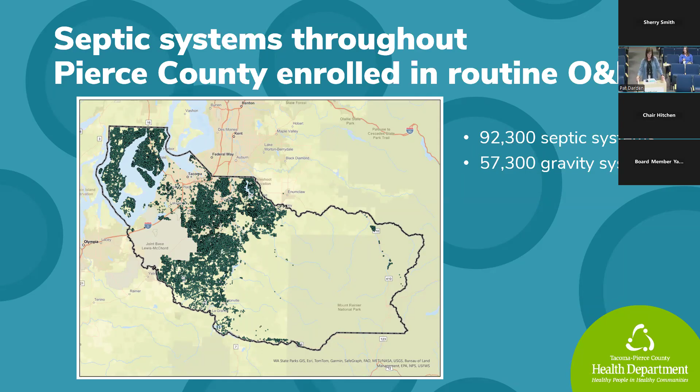So our reduced inspection frequency, again, we've heard from community members, this is a burden to them. It's expensive to maintain their septic systems. And so what we did is we successfully petitioned the Washington State Department of Health and asked for a waiver to increase the time between inspections. This is only for gravity systems, from 3 years to 5 years if they meet certain criteria. And so we're really proud to say that we're the first county in the state and the only local health jurisdiction that offers this option.

Homeowners can take a class. They learn best practices, what to watch for, and there are some questions that they have to answer. And so when they do that, they can then have their next inspection date moved from every 3 years to every 5 years. So that gains them 2 years without having to do an inspection. They still have to be done by a professional, but that's a benefit. It basically gives them an extra 2 years, and it reduces their cost almost in half to actually do their own inspections.

So providing education and guidance on maintaining their system empowers them to use best practices. It helps them extend the life of their system, which are very expensive to fix. You've probably heard us say before, the current system they have is the least expensive they're ever going to have. And so that's true. And we've had really good feedback from participants in our classes so far. Next slide, please.

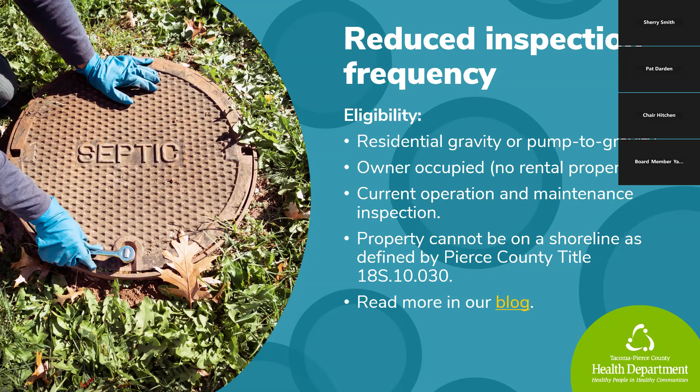So what we've done so far, next slide, is we started this in September of 2025 as our first pilot project. We've held 7 classes so far, and actually technically we've held 8 because we had one last week. We've had good success with that. We've had 162 people apply. Of those, 129 were approved. So that's great. The 33 that didn't qualify has normally been because they didn't have a gravity or pump to gravity system, so it's some other kind of system, or they were too close to a shoreline or water. That's been the majority of reasons.

The way that we notify people as we've rolled this out: we already send notifications to people to remind them they need to inspect their systems. So we incorporated this information into the letter we already had going out, just to say we've got a new opportunity for you, and it only goes to people that have gravity systems. Then we let them know that there's a class available. They get that letter 2 months before their inspection is due, so they have 2 months to get into a class. Of course, if they need a little extra time, we can give them an extension. So we work with them on that.

But it's been really good for people, and really good feedback that they learned a lot. And so that's what you're going to experience today with Amy. She's going to walk you through, like I said, a very abbreviated, slimmed down class, and you get to see what the public experiences. So with that, I'm going to hand it over.

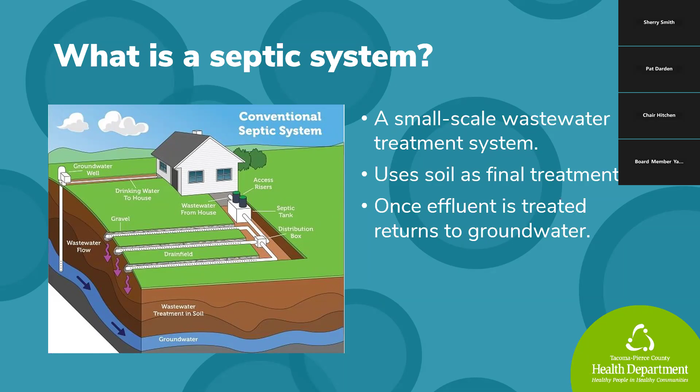So septic system overview. What is a septic system? A septic system is a small scale wastewater treatment system. It uses soil as the final treatment, and once effluent is treated, it returns to the groundwater. In this cross-section photo, you can see how the effluent goes from the septic system down through the soil to be treated and then into our groundwater, again a natural resource. Next slide. The first short video will provide information on the basics of on-site septic systems. So enjoy.

Hi there, welcome to Septics 101. In this video, we're going to cover the basics of sewage and on-site septic systems. In the past, sewage was not treated, and the outhouses or cesspools that were used did not effectively remove pathogens, which are harmful disease-causing organisms. Bacteria, viruses, protozoa, and worms can all be present in domestic wastewater and septic systems, and can cause diseases such as hepatitis, cholera, diarrhea, and other gastrointestinal illnesses.

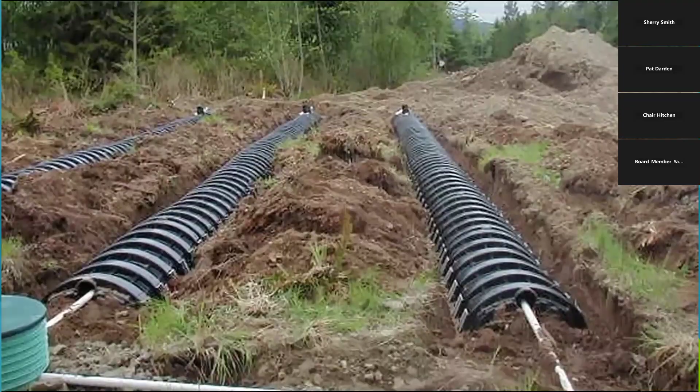In modern times, rules and regulations have been established on how to properly dispose of sewage. When not connected to a wastewater treatment facility or sewer, a home's best long-term option is a septic system. Clearly, it's important to make sure your septic system works properly. But first, you need to know how your system works.

In this video, we'll look at sewage and its potential impacts on health and the environment, and we'll explore the different types of septic systems and how they work. We'll also talk about being a responsible septic system owner and how to care properly for a system, as well as how to detect a system failure and get help. This is all to maintain the health of your household, for you and for your family, and protect the water quality, as well as save you money.

If you're completing this course for a certification program, there will be an exam at the end of the presentation. If you're looking to install a septic system, looking to purchase a home with a septic system, or simply wondering about your existing system, this video is for you.

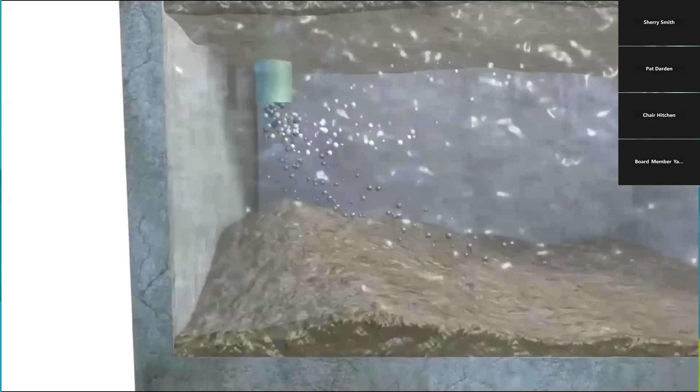So what is sewage anyway? Sewage is all the wastewater that comes from your house, your toilet, your dishwasher and washing machine, sink and shower drains, and all the solids and waste that comes with it. Up to 50% of domestic sewage is created by your clothes washer and toilet. Your dishwasher produces 3%, while your bath, shower, and sink faucets produce the remaining percentage. All this wastewater exits your house and enters your septic system. By the way, rainwater, surface water, and groundwater are not considered sewage.

Next slide. Next slide. Perfect. I know it's a little touchy with the videos. All right, so you guys thought your participation was over at the very beginning.

Nope, just kidding. So question 1, what is a septic system? Choose all that apply. Once you know your answer, I'm going to go through the list of them. Please raise your hand. A, a type of water treatment plant. B, a small-scale wastewater treatment system. C, a drainage system for rainwater. D, a public sewer system. How many of us chose A? B, C, or D? Next slide. B, a small-scale wastewater treatment system. Good job, folks. All right.

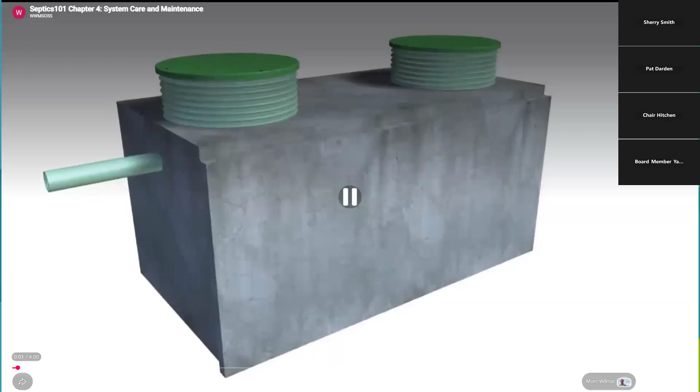In our next video, we will be learning about best management practices for your septic. Septic systems need regular maintenance, just like your car or your home. First of all, know where all the components of your system are located on your property. An as-built or record drawing is a technical diagram of your septic system. Check with your local health department to obtain a copy of your as-built.

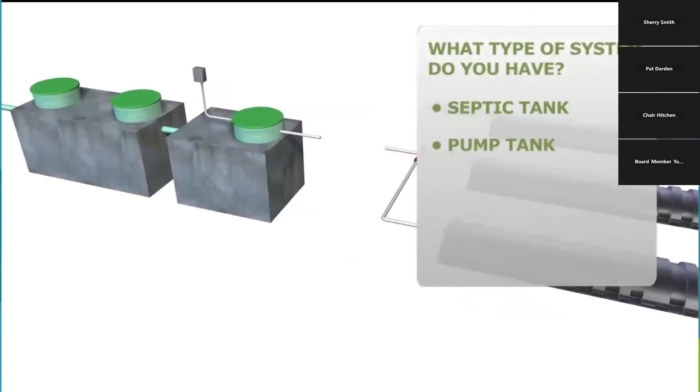The record drawing can tell you what type of system you have, where the components are located on your property, and provide other useful information. Record drawings are not always accurate, so make sure you verify it's correct. If you need to have your system located, make sure you also know the location of all utilities. Depending on the type of system, you'll want to know the location of your septic tank, pump tank, sand filter, distribution box, and drain field.

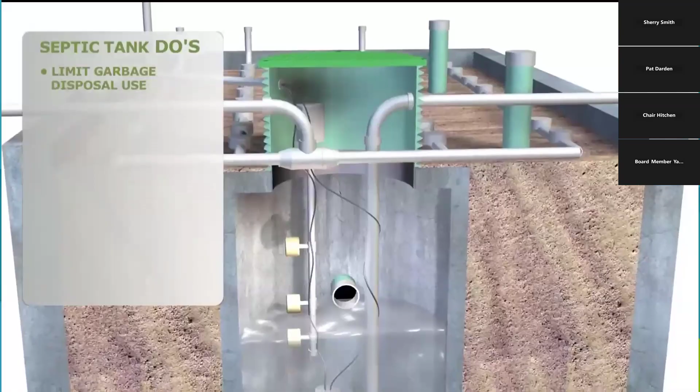Let's talk about what you can do to protect and care for your system on a daily basis. Garbage disposals grind up unprocessed food into fine particles, which can clog components of your system, like pumps or even drain field pipes and soil. Use it sparingly. An alternative is to compost. Make sure you have an outlet baffle screen installed to help protect the drain field.

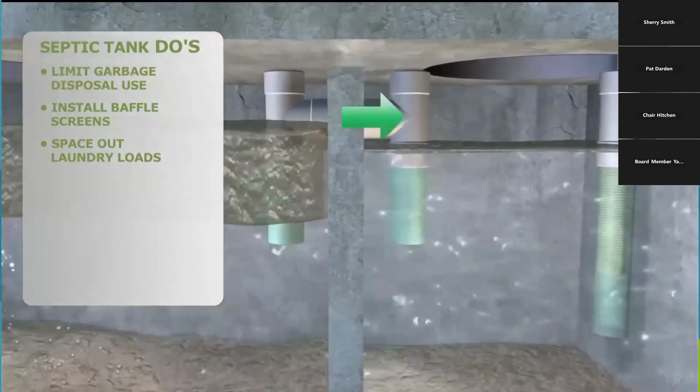Doing your laundry has a big impact on your septic system as well. Space out your laundry loads to allow your septic tank to settle properly. If water flows too rapidly through the septic tank, solid material will not separate and could move on to more sensitive parts of the system. Limit the use of bleach. Bleach kills the helpful microbes which treat the wastewater. Liquid fabric softener can seriously alter the chemistry within the septic tank, hindering proper treatment. Installing high-efficiency washers and toilets can increase your septic system's life and save you money.

Do not throw garbage into your toilets, or feminine products and wipes of any kind, even those that are flushable. Kitty litter and pet waste of any kind should never go into your septic system. Some cleaning products claim to be safe for septic systems. This may or may not be accurate. Look for cleaning products which use everyday ingredients such as vinegar and baking soda. If you do use strong cleaning products, just use less.

Never put paint, thinners, or strong chemicals of any kind down your drains. Many areas have disposal services for dangerous or toxic material. To dispose of unused medicine, bag it up and throw it in the garbage. Check with your local health department or pharmacy to find out whether a drug take-back program is available in your area. Do not drain hot tubs and water softeners into your septic system. There's no need to waste your money on septic additives. Just use your septic system properly.

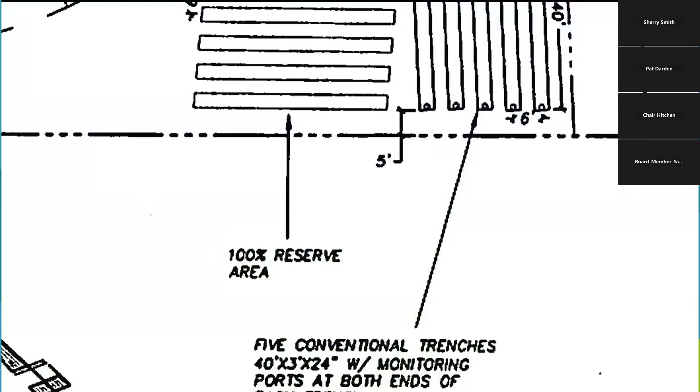Let's talk about how to protect your drain field. It's critical to protect your drain field and reserve area. The reserve area is a part of the property set aside in the event that the current drain field fails. Protect your drain field from motor vehicle traffic, parked vehicles, heavy loads, and livestock.

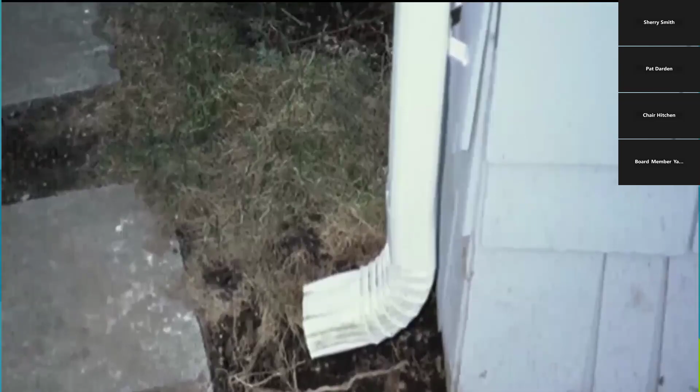Don't dig, use heavy fertilizer or weed killer on your drain field. Also, be sure not to build anything over your drain field. Protect your drain field by diverting surface or roof water runoff away from it. Look for shallow root plants. Contact your local nursery or health department for more information about what's safe to plant over septic systems.

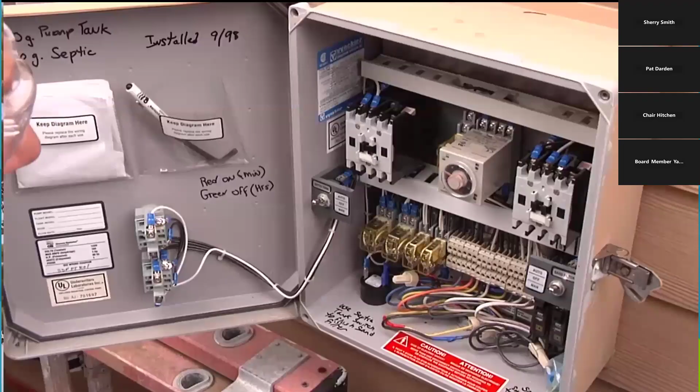Risers increase accessibility to the system for you or a professional. They can also keep costs lower if a professional needs to service the system. If you do not have risers, you should have them installed.

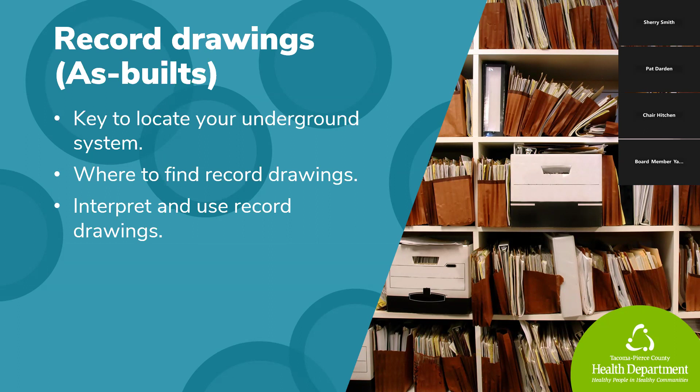Perfect. All right, we're going to go into our next topic, record drawings and/or as-builts. So record drawings or as-builts, these guys are a key to locate your underground system. We're going to look into where to find your record drawings, and we're also going to learn how to interpret and use your record drawings when you're on your site. Next slide.

So we're going to first go into how to find your septic system records. The link right here will take you directly to our document search page on our website. From here, you can try several different methods of search. You can search by parcel, you can search by address. If you're searching by your address, we always recommend trying to do your house number and then your street name. Oftentimes, the less information you give to the system, the more documents it produces for you, depending on how we saved them throughout the years.

You can also search by your owner name or a past owner name if you happen to have that on file. The instructions are there on the website to follow along to be able to search. If nothing is pulling up and you're not able to find any record drawings, we do have that little blue button on there that you can submit a public records request, and you'll fill out all the information, send it to us, and then we will do our work on our end to see if we can dig something up. Oftentimes we have different tools that we can use to be able to source something down.

Keep in mind that some older septic systems were installed when record drawings weren't necessarily a requirement by the health department. So oftentimes there won't be a record drawing on file for those older systems, but your septic company can help to locate your septic system if you would like to have that done. That does come at a cost. So always just keep that in mind if you're thinking about doing that. Next slide.

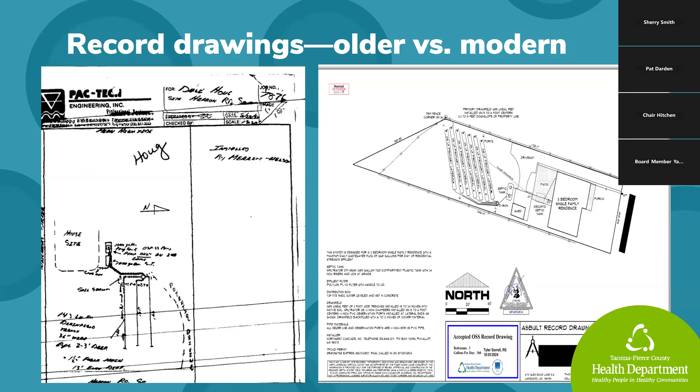I always recommend people go back, especially if they're new homeowners to a new house, and look at the history of what the septic system has been through. Has it been maintained on a more regular basis? Have there been any repairs, pumpings, inspections, etc.? It's always great to go back and look at the history of the septic system and the life that it's lived so far. Next slide.

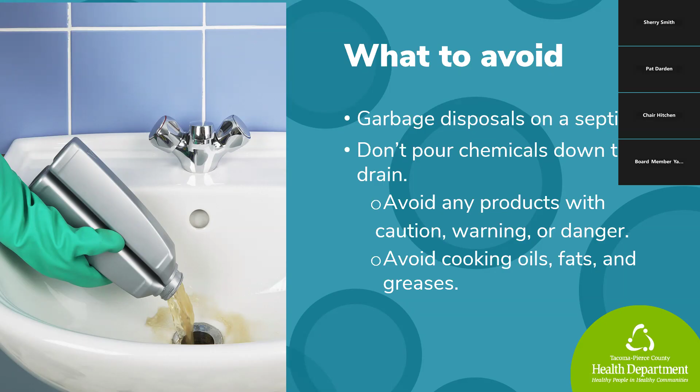We also want to conserve our water. So break up those household chores that use water. So limit the number of laundry loads per day, run the dishwasher, the clothes washer, and even the shower at different times. I even do this and I'm on sewer, so it's always a good practice. And then fix your drips.

A leaking faucet can waste 5 to 20 gallons per day, whereas a leaking toilet can waste up to 4,000 gallons per day. And yes, that seems like a lot, but what impact does that have on your septic system? If you're overloading your septic system with water, it can cause a potential failure quicker. So just keep that in mind. You want to be using the gallons per day that it's sized for. Next slide.

Protect your drain field. Avoid heavy objects over your drain field. Don't park or drive over your drain field. Heavy animals can compact the soil, and they can also damage the components. So just make sure you keep those clear.

Keep full access to your septic tank. Don't build a deck over your septic tank. There's been many times where I've gone out to do a property sale inspection for a septic system, and I get there on the property and it's a deck, of course, on top of the septic tank, right? A lot of homeowners are very smart and they will build a latch system so they can pull up their deck. And then there's easy access for us and the septic professionals to be able to get to that. So we just want to make sure we can get to all the components in case there's an emergency happening, right? Next slide.

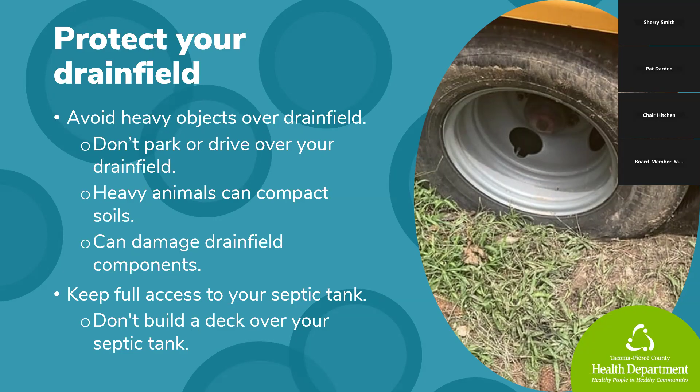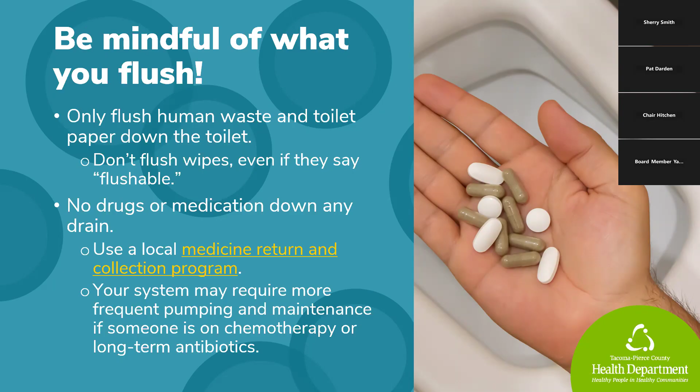Be mindful of what you flush. Only flush human waste and toilet paper down the toilet. Please do not flush wipes, even if they say they're flushable. I promise you they're not, and this goes for sewer as well. No drugs or medication down the drain. Use a local medicine return and collection program, and we do have information about that here on our website. Your system also may require more frequent pumping and/or maintenance if someone is on chemotherapy or long-term antibiotics. Next slide.

And why would it need more pumping or maintenance if someone's been on chemotherapy or long-term antibiotics? It's because in our septic system, we have what's called a microbiome, right? It's more sciencey talk real quick, but your septic tank is full of microorganisms, or what we like to call bacteria, right? These little guys help to break down waste to help prevent the solids from going out into the drain field and from building up in your tank.

So think about household cleaners, right? Disinfectants that we spray on our countertops. We want to use them to get rid of bacteria. Same thing if you're pouring too much down your toilet, down your drains, into your septic system, it could actually kill off that microbiome, those organisms that are helping to break down those solids, right? So we just want to keep them happy and clear. We don't say you can't use cleaners or additives. We always just recommend using them for what they're designed for. Use the dosage that's correct, right? Don't overuse them. Next slide.

All right, get our hands ready. Here we go. A leaking household fixture can cause harm to your septic system if not addressed. True or false? How many chose true? And false? I hope no one chose false. Good job, 100%. All right, next slide.

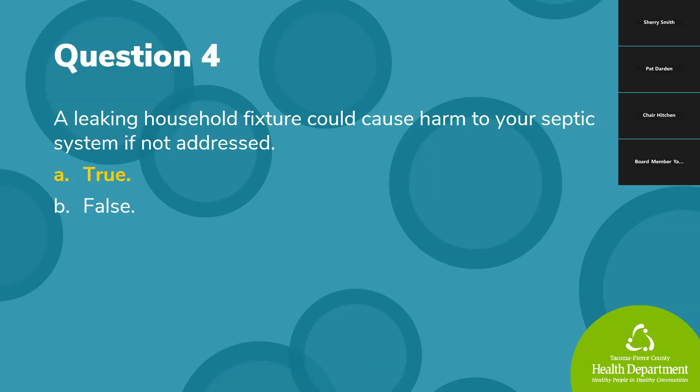So what should you do before a septic inspection? Get a record drawing of your septic system if there's one available. Call a septic professional to inspect your septic system every 5 years if you are part of this program and have been approved. We do have a certified professional list on our website, so you're more than welcome to look into that. Locate your system components and uncover tank lids for the septic professional. You can do that, or you can let the septic professional do that as well. They have to pull up your record drawing anyways before they come out on site. If they uncover your lids and they have to dig to them, usually that does cost something. So if you're trying to save some money, maybe dig them up yourself or have a friend do it.

Review your water usage and then just maintain those records. Look up the inspection reports, know what's going on with your septic system, especially after you just had a professional go out there. Look at the report that they submit just after your inspection. Next slide.

So what should the septic professional do when they come out on site? They're going to inspect the septic tank, right? They're going to inspect the pump tank and the pump if you have a pump to gravity system. They're going to pump the tanks if needed, so they'll measure your scum and sludge level and make sure they're at good operation levels. And then they're also going to check the drain field area. They're going to walk your drain field area, make sure there's no ponding, no squishy soil or a smell coming from your drain field. That's what they're going to really look out for. Next slide. All right, things to watch out for.

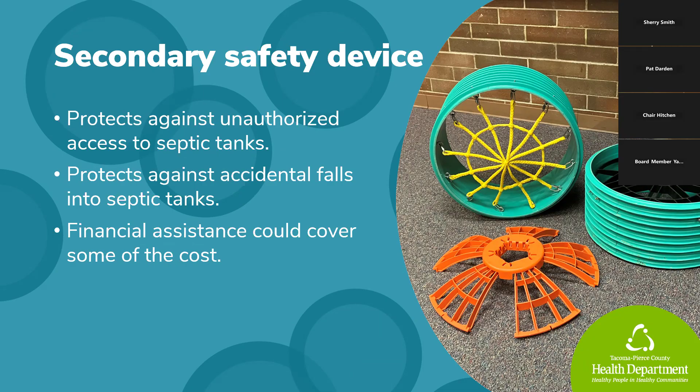Next slide. Perfect. And what is a secondary safety device, you might ask? It helps protect against unauthorized access to septic tanks. It protects against accidental falls into septic tanks. And here at the health department, we do have financial assistance that can be offered to go towards and cover some of the cost for a secondary safety device to be installed. Next slide.

Tank problems. Missing or broken baffles. So the inlet baffle assists with separation of liquids and solids as the wastewater is going into your tank. The outlet baffle prevents solids from entering into the drain field lateral lines. And usually, if solids enter into our drain field lateral lines, that's where you start to see clogging happening in your drain field over time.

Leaking tank. Low liquid levels could mean a cracked or leaking tank. So you always want to make sure that your system is at operational levels. Next slide.

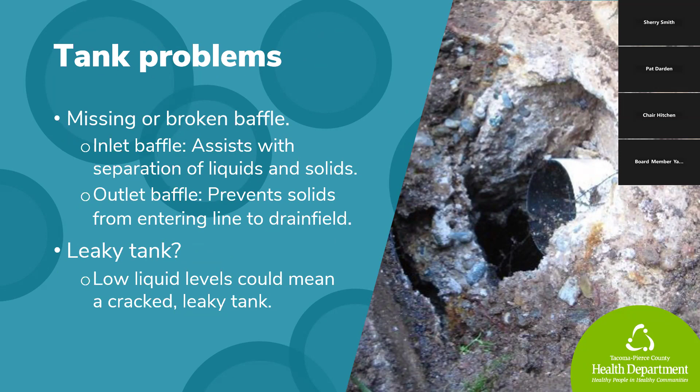Electrical problems, pump malfunctions. So only septic professionals or electricians should repair or replace. An alarm malfunction: an alarm should usually sound when the water levels are high in a pump tank. Gravity systems might not have pumps or alarms. I also advise with a pump to gravity system, alarms weren't really required until about 1982 in our county. So your pump to gravity system might not have one on.

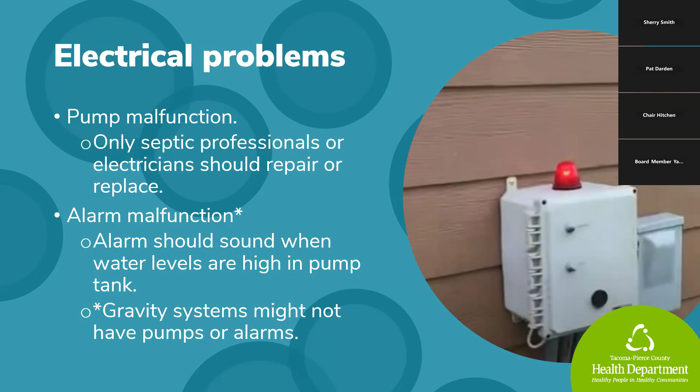Doesn't mean it can't have one installed. So something to think about if you know you don't have an alarm on your system. I always recommend just kind of thinking about it. It helps protect to make sure, again, your system is at operational levels. And then call a professional. Don't mess with your control panel if you have one.

Some newer systems don't have panels, or do have panels like this one, excuse me. If you have an alarm going off from your panel, you might usually be able to silence that alarm. But you can silence it, but call a septic professional to come out and see what's going on with that panel.

All right, next question. What are signs of potential failing septic system? Choose all that apply. A, dry drain field when there's no rain or irrigation. B, sewage backing up into the home. C, low levels in the septic tank. D, dead vegetation or brown area over the drain field.

How many of us chose A? I can feel the tension. B, C, or D? Okay, next slide. The correct answers are B, C, and D. Good job, everyone. I'm impressed. All right, next slide. Thank you.

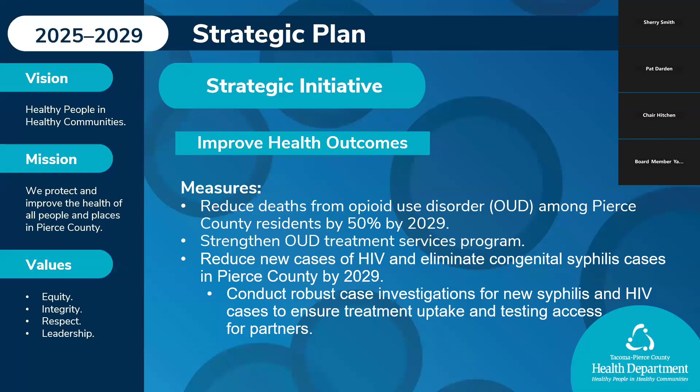So we've linked a couple of the measures from our strategic initiative and our strategic plan, of which we're measuring the reduction of deaths from opioid use disorder among Pierce County residents, as well as strengthening our OUD treatment services program, as well as reducing new cases of HIV and eliminating various STIs in Pierce County by 2029.

So currently, our public health clinic provides the following services. We're providing STI and HIV testing and STI treatment. We're also providing opioid use disorder treatment, and that includes both medications and counseling. Under the public health clinic as well, we have our street medicine program, which you heard about probably recently, addressing urgent and primary care services for people experiencing homelessness.

So previously, these were siloed and they were in different divisions and locations within the health department. And you'll see some of the areas downstairs when we go take a tour. Next slide. So why clinic integration? Really in order to combine our opioid use disorder and STI and clinical functions in the same space. We also are now, because of the integration, able to offer daily walk-in services for HIV and STI testing.

We also wanted to be able to provide a continuity of care and access to different services. Originally, the clinic was just our opioid use disorder facility. And also, programs are sharing resources and systems to increase efficiency. So now we're seeing a lot of close collaboration and workflows between our street medicine team and our STI, for example, and STI and our opioid treatment program as well.